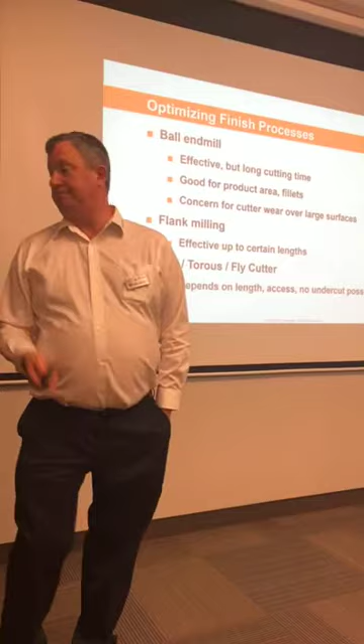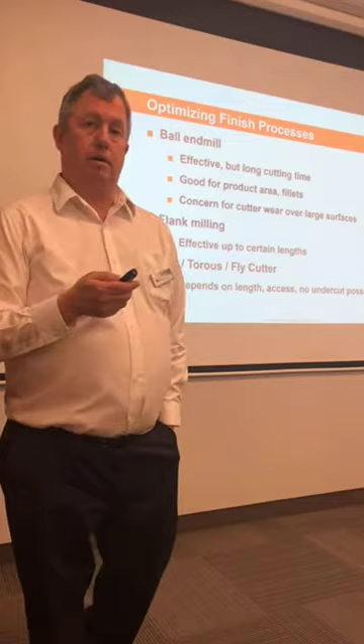Okay, so we're going to talk primarily in this hour about finishing surfaces. Everybody has to finish surfaces, really important because that's what people will see. The typical process on most parts is going to be ball end mills, and it's easy, it's well understood in 3-axis or 5-axis, but it takes a long time, a lot of passes, a lot of small steps.

In some cases, when you have simplified surfaces, you can use flank milling with the side of the cutter against the side of the part. In certain shapes, that's perfect. In other shapes, you get deflections, vibrations, and poor surfaces. For bottom type surfaces, you can use flat cutters or fly cutters. Again, there may be limitations with undercut or long lengths.

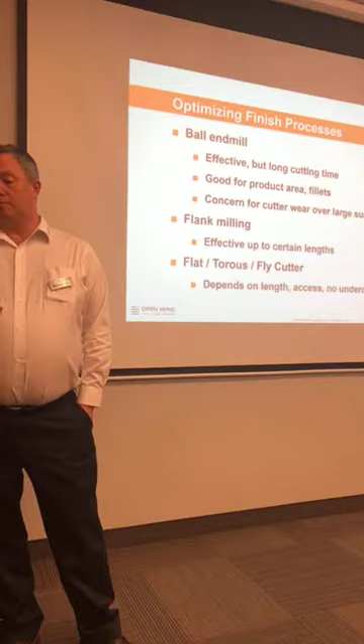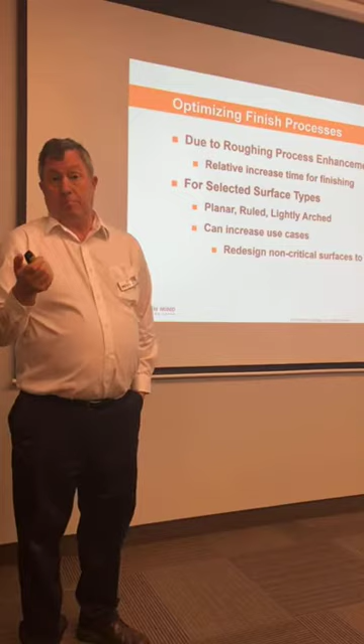So we looked at this, watched people cutting parts, and looked at the time of finishing and tried to come up with a process. We looked at planar surfaces first. Planes would seem simple, they're easy to work with, but there's a lot of planar surfaces in the world. Large automotive molds, aerospace, structural parts. We looked at ruled surfaces, similar but slightly more complex, and then just generally arch surfaces. And you can see that out in the shop on the 520 machine later on. We'll talk about that here.

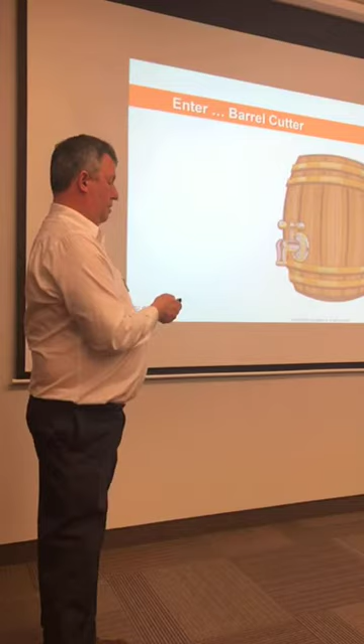So the concept we came up with, being a German-based company, was a barrel cutter. It's not a new type of cutter, but it's a new implementation for barrel cutters. And since we're machinists, small joke, we have cooling through on our barrel cutters.

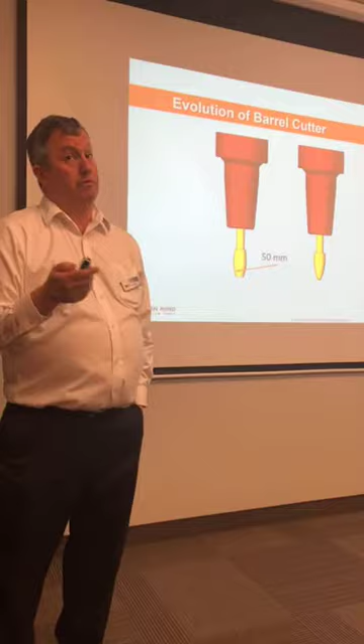So these are barrel cutter styles that I purchased when I was working in a shop in the late 80s. It would take 8 weeks to get a cutter. The project maybe was done in 4 or 5 weeks, so we didn't really use a lot of these. They were available, but they weren't very practical.

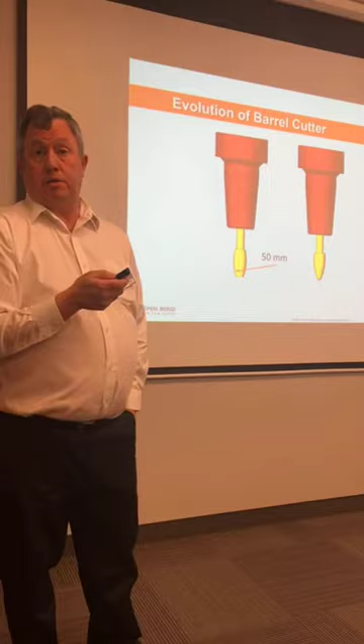Here we have, looking like our beer barrel, above and below the equator, but a fairly small radius was possible at that time. And then it was more advanced. They put a ball end mill on the bottom, and the last one, fairly common today as well, coming tangent to the shank of the cutter and using this barrel. And it's not a bad solution, but we're going to talk about and understand why we can do better.

So, let's see, get my buttons right.

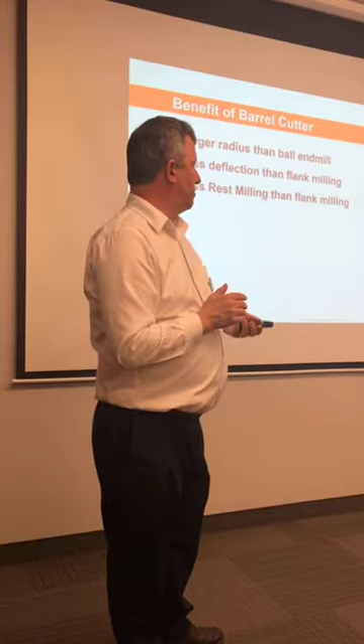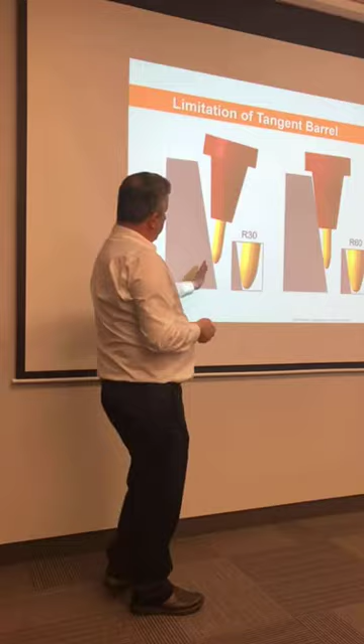As we do this, we get less deflection than that flank milling because we have a single point contact, so that's nice. And we started thinking how to apply this more and more. And we look here at the tangent barrel, and what happens when you increase the radius of the contact, the barrel. As you increase the radius, you can take a bigger step down. That seems like an improvement.

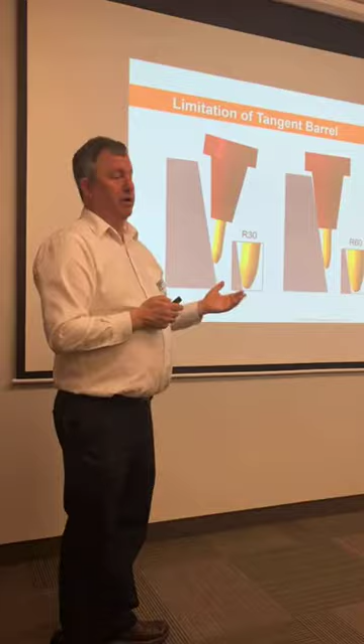But with this constraint to be tangent to the shank, as you increase the radius, you get a smaller arc. The cutter stands up, you get an interference, and the only way past this is to lengthen your cutter or reduce the radius. So you're not quite optimizing your situation. Still better than just using a ball end mill, but not the right solution.

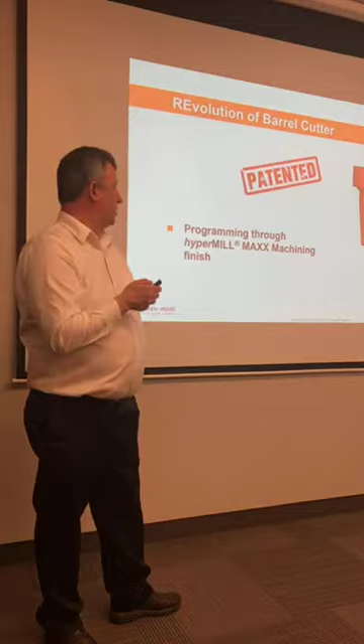So we went a little further, and some aspects of this are patented, which is nice, so we can talk about this pretty openly. We developed this in our high performance functions we call MAXX Machining. We have a cone angle here, in this case 17.5 degrees, and a large radius.

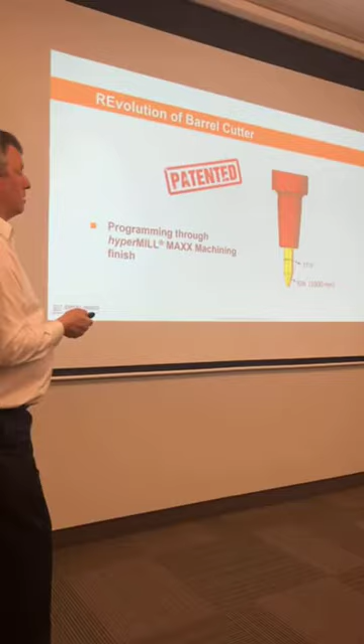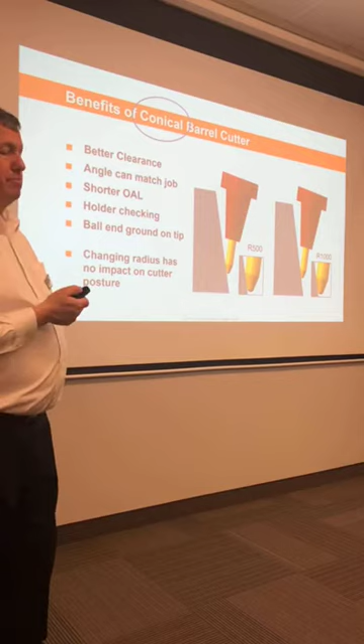And with that large radius, we had 30 and 60 on the previous slide. Now we're looking at 1,000 millimeter, in harder metals maybe a little bit smaller, just to improve the machinability. And here we look at the same kind of picture with a conical angle together with two different size radii. The posture of the cutter does not change. So the cone angle is what's controlling it.

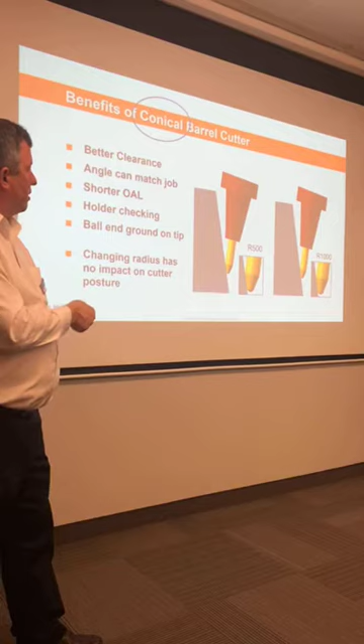We can design these cutters. Matthew has them cataloged. He can make specials. If you have a small drafted wall, you just need to tilt away from it. And as with all 5-axis machining, when you're tilted away, you get a short cutter. You can get your holder into the work channel, and you can save cutter costs, and you can increase your manufacturability with a short cutter.

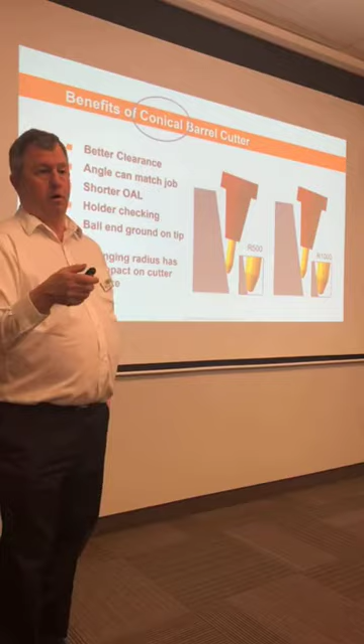So I think we hit most of the high points there. In this technique, in OPEN MIND's world, we call it conical barrel cutter. Matthew will describe it as their trademarked arc cut, a segment of an arc on the radius, so all the same. Here's a video. Did we do this right? Good. And it's what you expect.

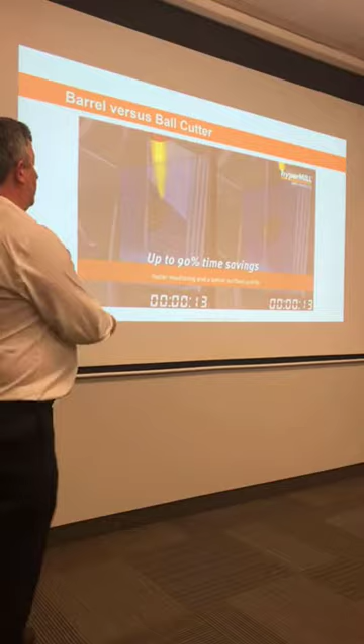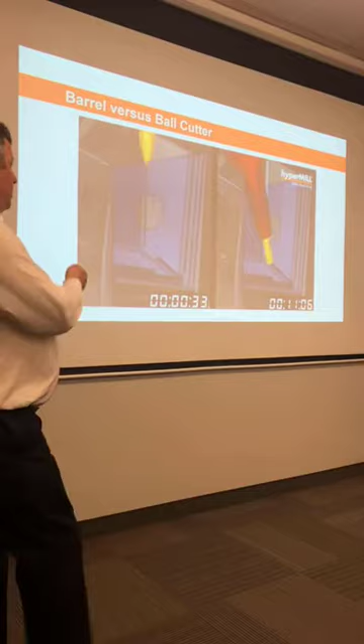But these aren't small changes, these are big changes. And we've had this 4 or 5 years. The message is getting out. It's getting easier to describe this. People have seen it on the web. And now we're in this position where people are interested and it's not novel anymore. You can try this. Easy to try.

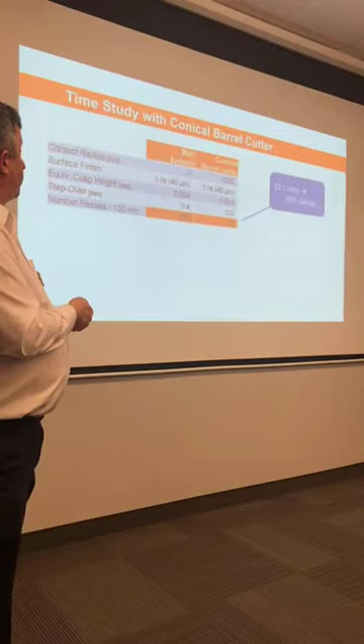A simple time study type of chart. Contact radius went up from 3 in this case to 1,000. Surface finish, we want the same. So here the number of passes, by the time you calculate it out, is more than 10 to 1. That's your 90% savings.

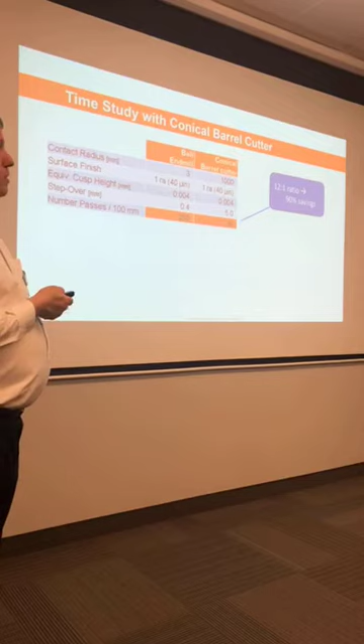People worry about the cost of the cutter. It doesn't cost so much. Maybe it costs more per unit, but if we're going to take 90% less passes, it's going to last maybe 10 times as many parts. So what's the cost per part? Very low. The cutter, if we recall from the other slide, had a ball end on the bottom. So you have a dual purpose, you have a second life.

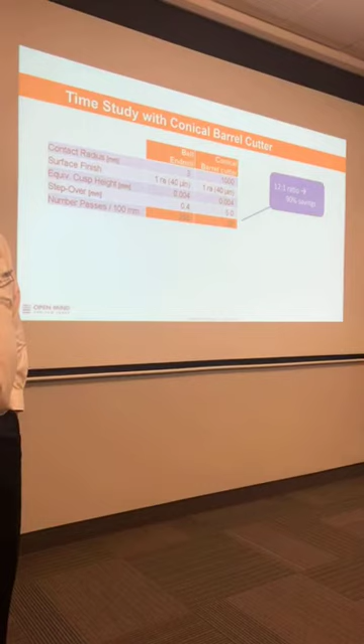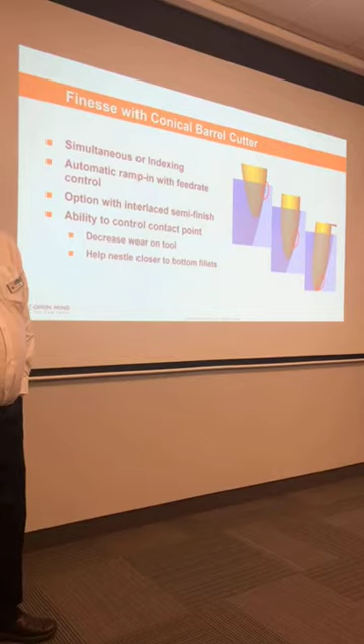Also, we can influence the contact point. So if you have a hard metal and you're going to wear out the cutter because you're cutting titanium, nickel alloy, if you have a different contact point, you can, in this case, increase the life another 3-fold or more. So the cost of the cutter is your first obstacle. It shouldn't really stop you in any way. This is, at this point, a 5-year proven process. It's smooth and it pays back.

The other benefit here, the last point, as we move the contacts down, we're also getting closer to leaving less material remaining behind, cleaning up into that fillet as best we can. So, nice operation. Here's some applications. Now we have a bottom surface. This is an airfoil structural part, 14 inches, 6 inches tall.

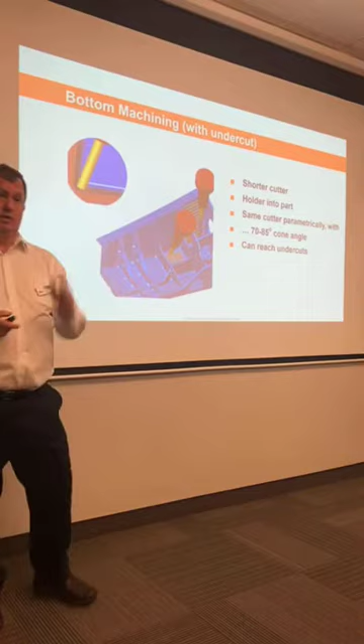If I came to do the bottom of those flat planes with a bullnose cutter and it's 6 inches long, and I need a 6-inch cutter because otherwise I'm going to rub this adjacent vertical wall, we have a problem, because a 6-inch long cutter is not going to cut really well. So now we have a 3-inch cutter. It's a plane. If it's a side plane or a bottom, it's the same. Here we're just going to tilt up a very large angle.

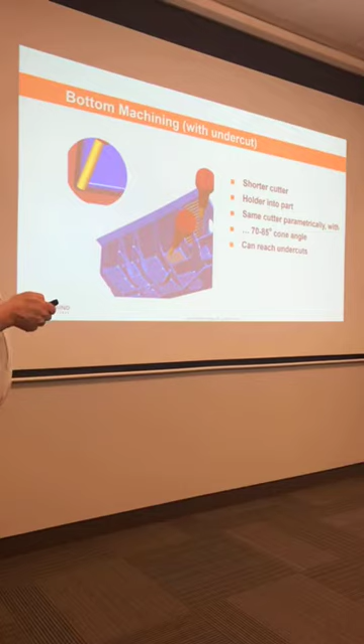We're cutting what looks like the bottom of the cutter, but it's that same conical cutter just flared out to a much bigger angle. So we can apply this to bottom machining, including here a slight undercut if your part has it. You can't do that with a flat bottom cutter unless it's some oversized one with a small shank. So some good things are possible.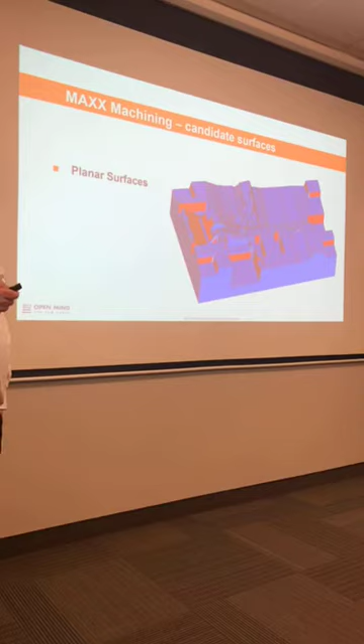Here's a typical automotive fascia mold. The red surfaces are initial candidates just by looking at planes. So this, I can cut that from the side, but it might be too large. I can cut this at an angle, but maybe the holder's going to hit here. So these red surfaces are our candidates for barrel cutting on this part.

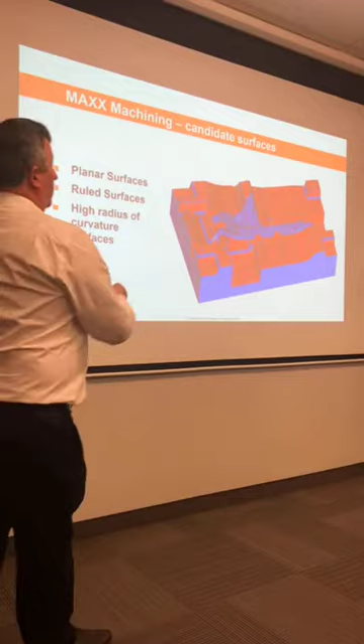If we look at the next slide, now I don't only do planes, but I can do any large radius surface. We can do almost the entire part except for the product features on the mold with barrel cutters. And we have customers redesigning their parts to enable more and more, because if it works, why not use it more often?

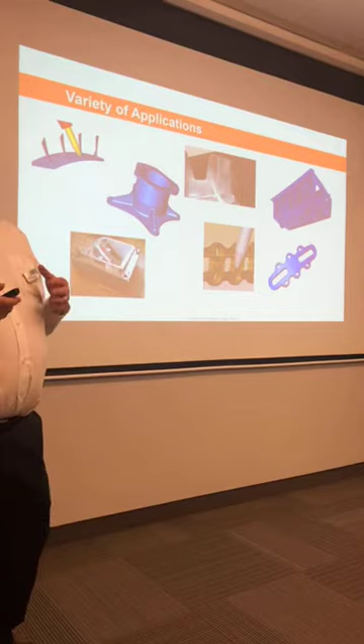So the applications could be in any industry. In our internal meetings, we don't want the Rocky Mountains up and down, but we're doing the medical spine plate on the machine out here, aerospace, molds, turbomachinery, anything with fairly large open surfaces.

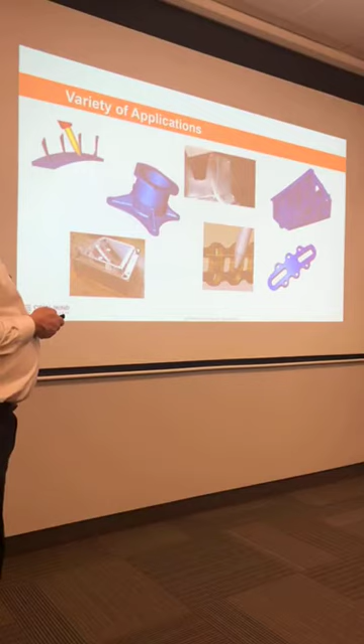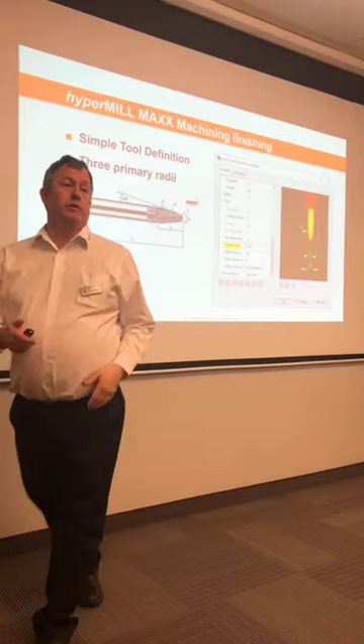But in our tool database, we have a barrel cutter style, and there's many geometry versions. This is from Fraisa's catalog. These 3 radii map out to 3 radii in our tool entry. It's very simple, so it's easy to apply this. You can build up a database. You can bring in tool parameters, and everything's easy to work with.

Unlike other new technologies, you're already cutting your materials. You use 5/8 shank cutters. There isn't too much that's different, but the amount that is different is powerful.

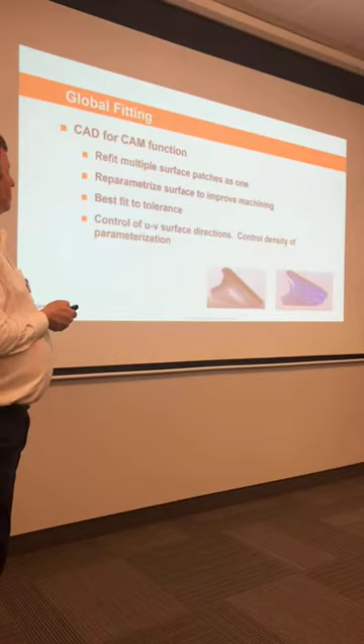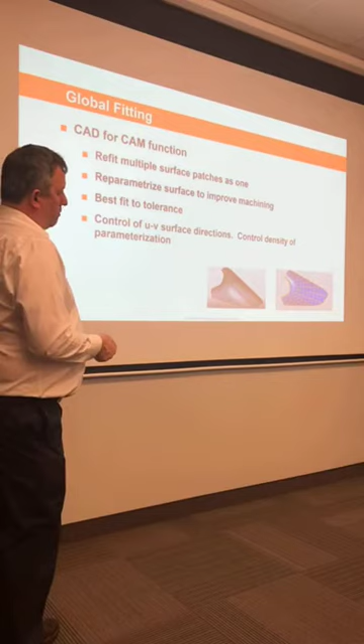We then learned, got some feedback from the first few early customers, and, I don't know if you can see it so clearly, this is some aerospace kind of part, but it's all patched up the way that sometimes CAD data comes in. We're running these tool paths over the surface, and we have to follow the surface parameters. So we came up with our own CAD function to refit a surface within a tolerance, and here to control and improve the parameters of the surface.

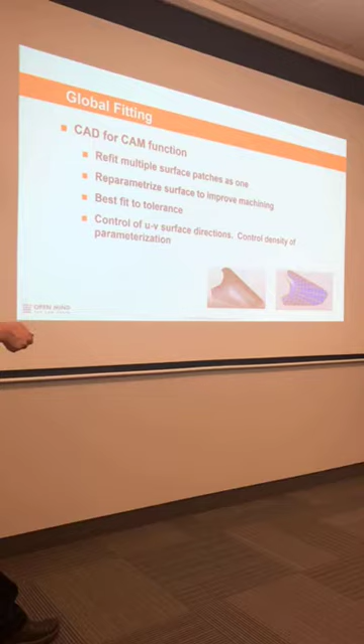Initially, we couldn't use the barrel cutter as effectively here. We'd have to do this surface and separately that surface. Now we can do it all as one. So we're increasing the application set for barrel cutters. And this spine bone plate was an example of this. We resurfaced it within tenths. So technically it's good, and it's smooth, and it works out well.

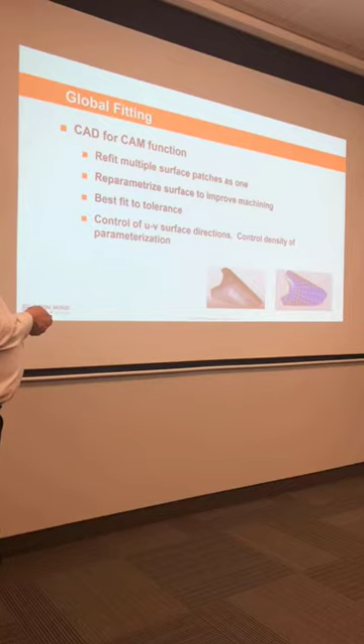So the standard barrel cutters are good. They're better than ball-end mills. The conical barrel cutters, better yet. Easy to program. Just click a surface. We'll check the boundaries, and we'll make the tool paths for you.

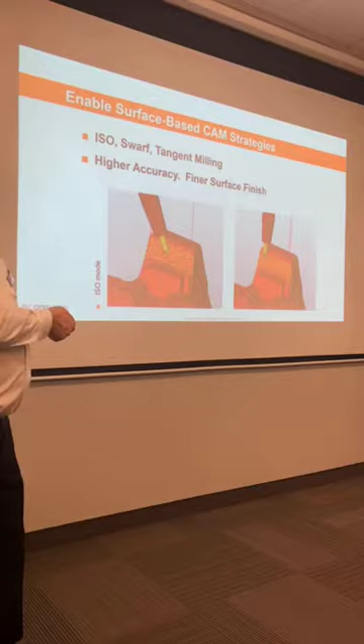Here's another case where we use the reparameterization just to improve the orientation of the cutter. So the UV is controlling where the cutter is going to be oriented. So that one worked out nice.

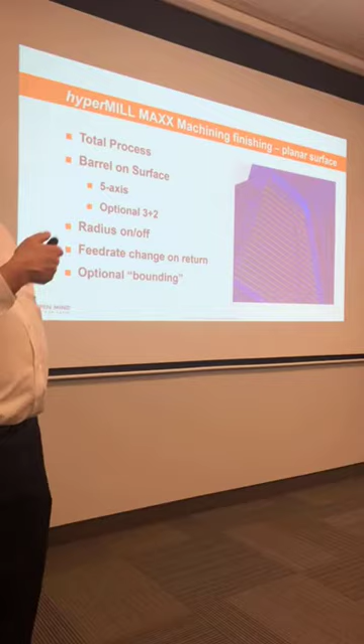Here on a planar surface, but in the middle of a complex mold, you can see a little bit some smooth rapid or smooth entry and retract. There's also a feedrate change, so when we move into rapid to reconnect, we're trying to be efficient. So we're not just focused on making a tool path go on the screen or on the part. We're making an entire overall process that's going to work out of the box onto your machines.

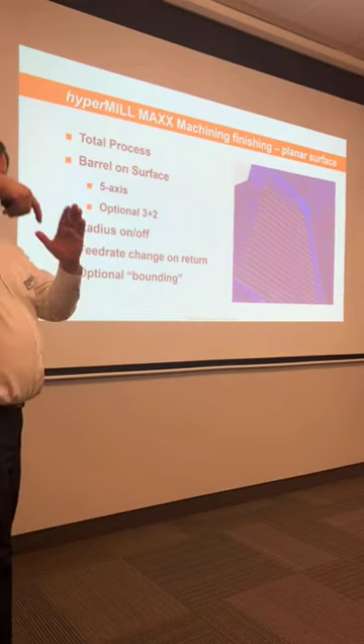The large cutters, when you have an internal corner, you may need to add some bounding passes, because the big barrel can't get all the way in, but we control it and you can use the ball end on the bottom, so everything's perfectly aligned. It's the same cutter, the same touch off on the machine, and you can get really nice blends with all this stuff.

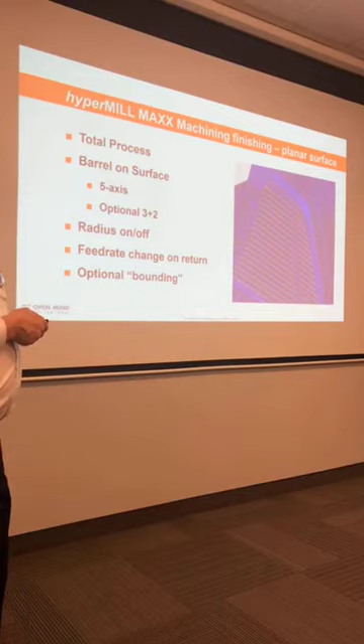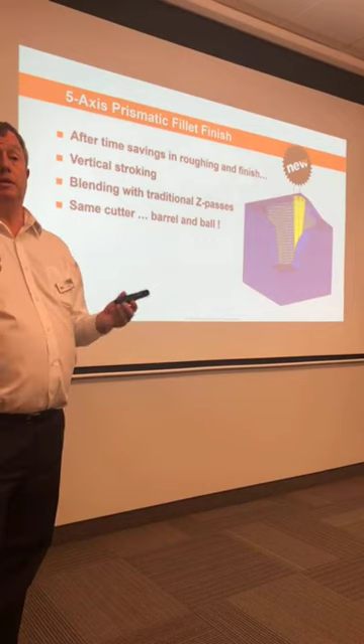So we started saying everybody has some high performance roughing. Very good. We added high performance finishing. What remains after, on many parts, is a fillet surface. And now on those fillets, you might still be doing some little Z-level step down with a ball end mill, and it takes a long time. So we've added and expanded again in our most recent release of the software, handling fillets either with a ball end on the bottom or, for larger fillets, the barrel. So we can do it in far fewer steps.

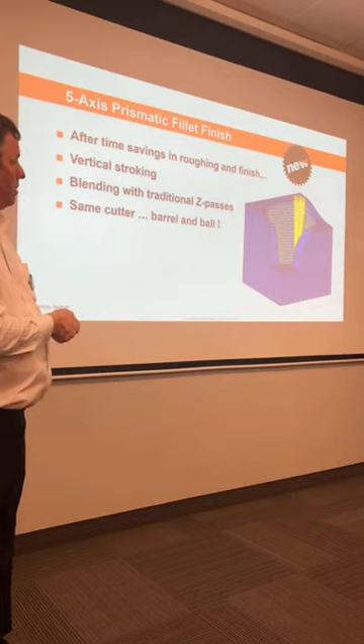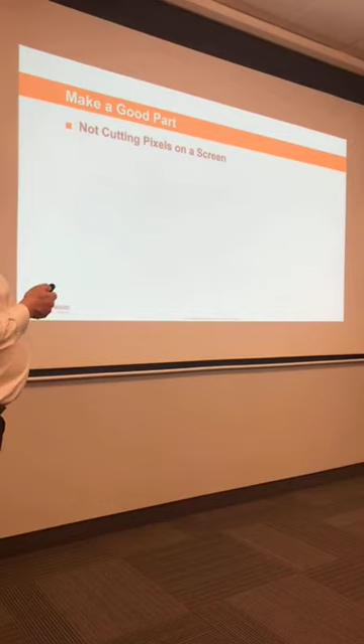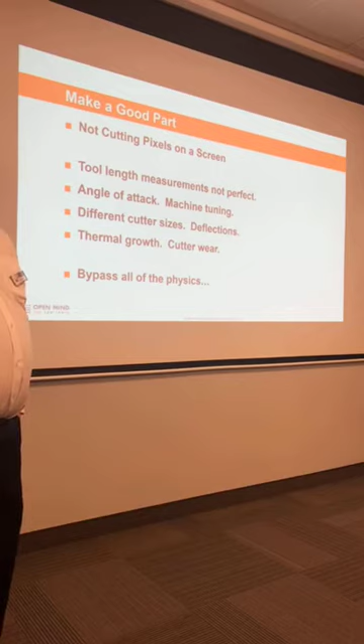So then a few little touch-up points to finish my portion here. We're trying to make a good part. Many years ago, our focus was to make a good tool path. If you had a good tool path, you would presume you get a good part, but there's some realities that happen in life. You know, the machines aren't perfect. The cutter lengths, the probe touch-offs, the machine heats up. There's all sorts of reasons going on. The cutter wears down, maybe the biggest one, and things don't blend well.

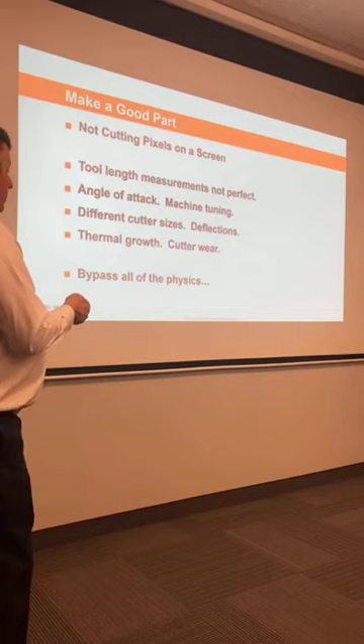So making the good tool path on the screen was great, but our goal in the end is to make a good part that, as was mentioned earlier today, you can sell. It's a part that doesn't need finish. So we could try to analyze all the physics that go on here, how to make a machine that holds tolerance in 85 degrees or 65 between morning and afternoon. So we said, let's bypass all the physics. It's not that hard. And we added some technology we call blending. And we've automated this blending, so you're not having to do a lot of CAD work to modify surfaces.

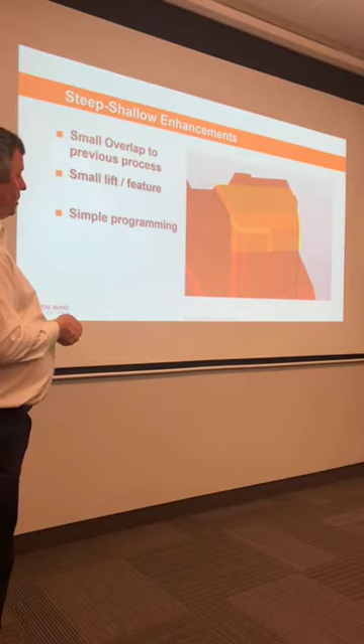First kind of blending we're doing is just the way we overlap. Typical process is steep and shallow sections programmed and cut differently. With this small overlap and then a small lift, so you don't come in together, just with a small lift, one button in the software, and you can't find where that crease is anymore.

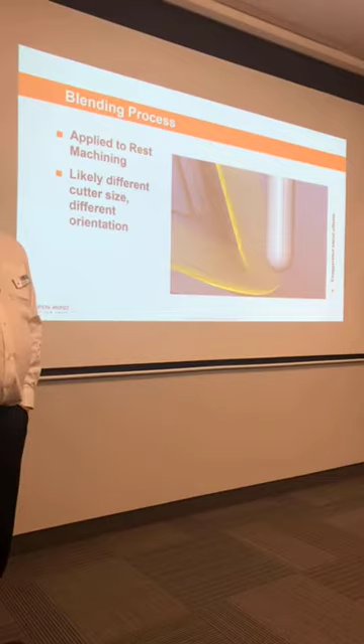Here, similar example, we're now in a fillet surface. So we cut this large wall, hopefully with barrel cutters. Then you come down to the fillet, and you have a small cutter. Maybe you've tilted it off to reach in there. And all of these issues about the physics on the machine come back into play. So I've exaggerated in this picture, but as we get to the top and the bottom of the fillet operation, we're going to blend out. A little bit of an overlap, and then a blend out, it's gone.

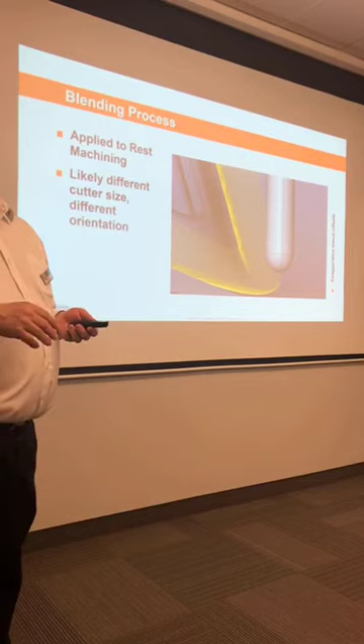So we initially released this to 2 alpha customers. One was making 6-foot steel blocks for these automotive fascias. First part off the machine, this is great. The inspector can come in from his automobile supplier. He's going to accept this. They would never accept the first one.

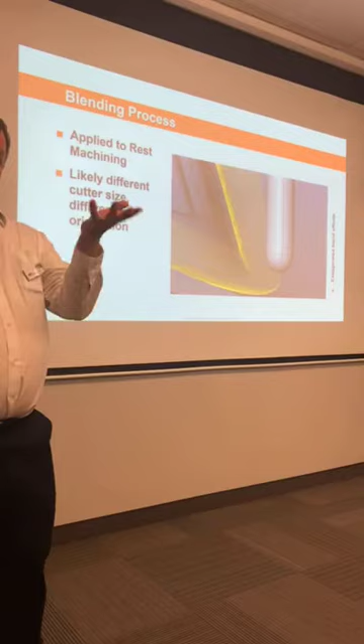The second customer was making small thermoform molds. You go to the supermarket and you buy blueberries and strawberries. Those baskets are made with HyperMILL. And he doesn't care about dimension, he just cares about the visual look, because in the end it's garbage. You eat the berries, you throw out the plastic. But he needed this blending.

He had a 10-year-old machine, and he says, I know HyperMILL's not the problem. My machine isn't keeping up. Please help me. We offered him the solution. He's still running the same machine 2 years later. So again, we apologize for not helping the sales of new machines, but customers are looking for solutions that make sense in their daily business.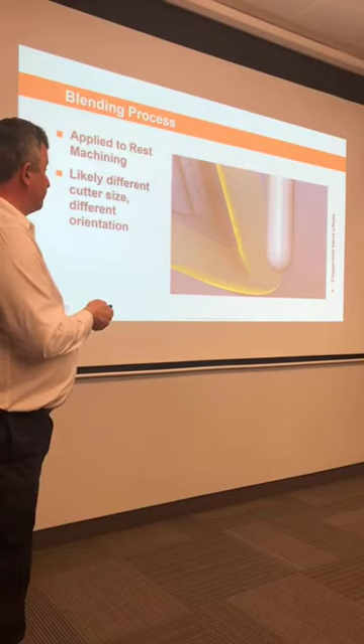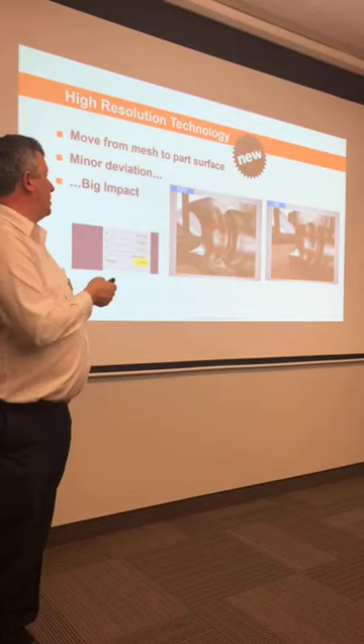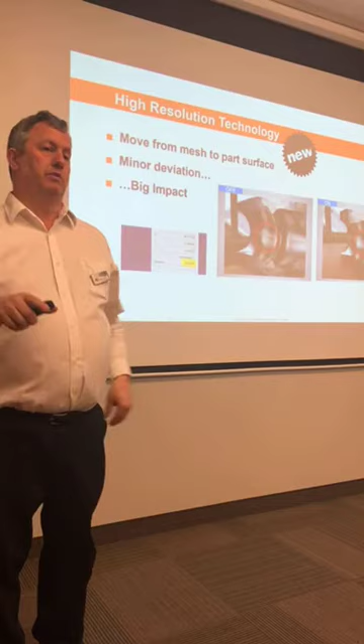Also in the latest version, and we're still collecting data, a new fantastic operation. Almost every CAM software is running surfaces to a mesh that sits on top of a surface. And this is a standard operation used in most CAM software. If you have multiple surfaces and blendings, it's hard to manage it in the CAM by putting one consistent mesh over the surface. We can treat all surfaces the same.

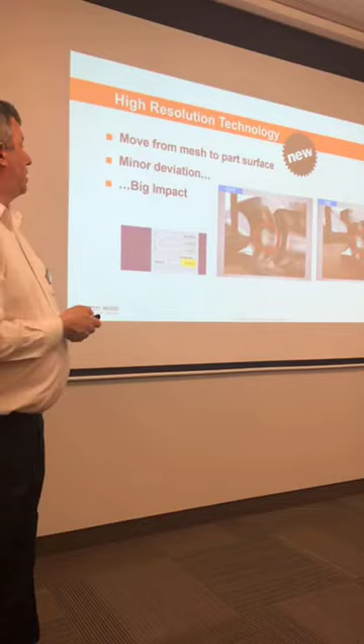We cut the mesh. So now it's a little hard to see as always because we're talking about microns, but we cut to the mesh and then we push it down to the surface. So we're actually cutting to the actual surface. We've had comparisons done against 3 or 4 other software. This result is making the difference. In one of these examples, in metric, we moved 0.002 millimeters, 2 microns, and that was enough to make the difference of a faceted look on a surface to a perfect look.

So again, focusing on finishing with the barrel cutters, here just on surface finish quality itself. And I think that's it. Matthew's going to continue and talk about the combination, software and cutters, and if you have questions, let us know or find us here.

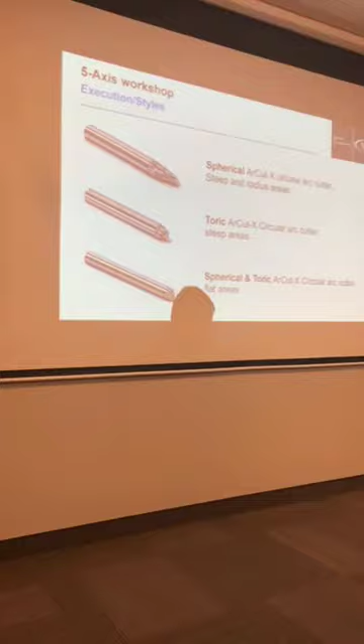So what I'm going to talk about is the ArCut-X, what we call our barrel cutters, and the different styles of barrel cutters we've produced. I'll talk about the geometry behind them, because it makes a big difference how you grind these tools, whether they're going to work with this software and in these applications. Then we'll talk about where to use them, expanding on a couple spots Alan already covered, with one use case. We'll also talk about our tool expert—when programming with this software, how do we get the right speeds and feeds to use these barrel cutters? That's not just a given; we have to figure that out.

We produce spherical versions of our barrel cutters—that's barrel to ball. We also produce a toric version. If you don't need the ball nose at the tip, we have just a third corner radius, kind of a bull nose to barrel. And we also produce what we call a floor finisher, or lens finisher—the steep angle version that lets us finish any flat horizontal surfaces.

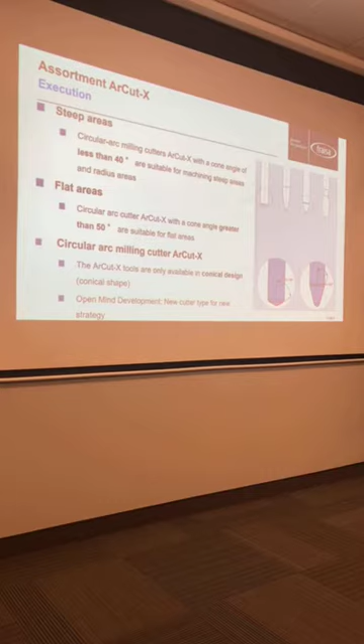The cone shape on our floor finisher is above a 50-degree angle. As Fraisa, we got lucky because we came into this a little late, so we didn't have to go through the evolution—we have the conical, made to HyperMILL's specifications, and then the floor finisher. So we're hitting the steep areas with the conical barrel, and the flat areas with the same conical barrel, but at more than a 50-degree angle, making it more of a floor finisher.

And like I said, these tools were specifically designed with HyperMILL in mind.

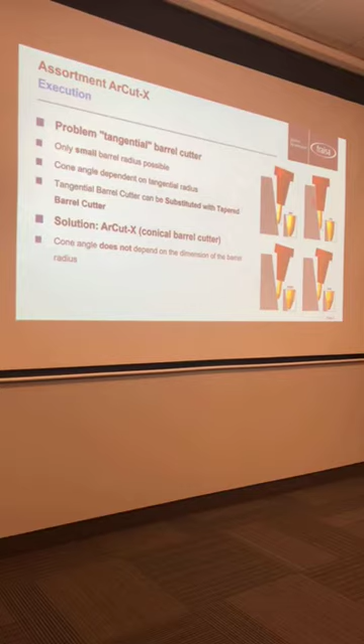The problem, as Alan showed with the tangential barrel, is that we absolutely have to stick to a small radius. Our solution with the ArCut-X gives variations of this up to a 1000 millimeter radius—roughly a 15 degree, 20 degree, and 30 degree version. Depending on your working angle, you can choose the right tool to maintain that angle. With the range we've created, covering 250, 500, and 1000 millimeter radius options, you should be able to hit the majority of the work you want to do.

But again, just like we did for this bone plate, if you have a radius that's smaller, we can produce the right size radius, like Peter mentioned. Take a look at that concave feature, and we can produce the right size barrel—it still makes a world of difference in time versus a ball nose cutter.

Whenever Fraisa produces tools for specific applications, we look at a variety of things. We're not the only players here—there are other high performance cutter manufacturers producing barrel cutters, but I'd like to highlight some of what Fraisa does. We look at raw material, what we're producing the tool out of, the carbide itself, and depending on the application we choose different carbides for different types of features.

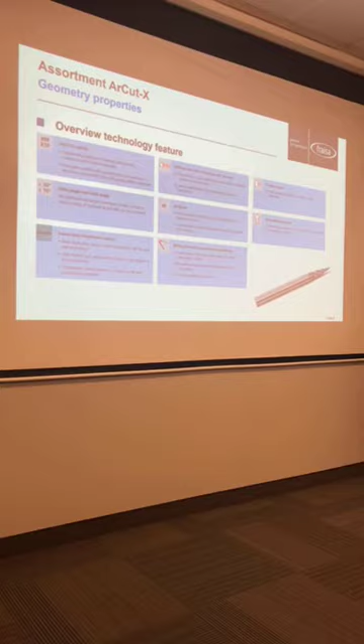We use what we call our X10 carbide. It doesn't really matter—I could tell you I got it from the moon, it doesn't make a difference. What does make a difference is that we tried different carbides in these applications, tested the tools, and came up with what we thought was the best result. When you're talking about a barrel cutter, it's just a giant ball nose tool, so we wanted a very hard carbide that can withstand a range of materials, plus these light cuts and more heat than what we're used to in a roughing carbide.

Roughing carbide that we use for roughing tools is more flexible; this is going to be a little more rigid. We've increased the core diameter. It sounds like, why wouldn't you be able to do that in any case? There's a lot more behind that—this increased core diameter is a difficult thing to accomplish when grinding these tools, to keep it consistent.

I know Alan said that once you've used our tools in a 5-axis scenario, it's probably not very expensive, but as Fraisa we also always like to resharpen these tools. So you have to be able to make the tool so that it can be resharpened. One of the key factors as well is H6, the heat shrink tolerance.

We grind ours to H5, so the shank tolerance is H5. That's going to mean better precision, better concentricity, more accuracy, less chance of slippage or pullout, which you probably wouldn't see in a tool like this. Dimensional accuracy is also something that is very critical.

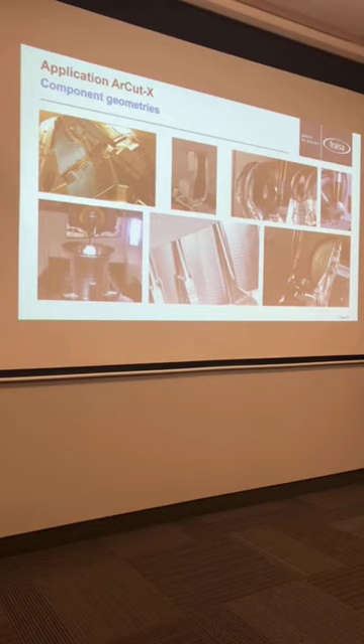So I think between Fraisa and HyperMILL, we have a lot of customers that are either sending us prints or models and saying, what would you do? So that's, I think, a good solution. Send it our way, we'll take a look at it and say whether or not we think there's an advantage to it. If there's no advantage to using a barrel cutter, then certainly we're not going to tell you there is.

So getting to the application part, we've created a software called Tool Expert for ArCut-X. What this Tool Expert does is basically look at what you want to do for your application. So you can go step by step.

That's where we're producing. This is actually either a bovine or an equine bone plate. So if your cow breaks a leg, then you might have to buy one of these things and put it in. But essentially what it's showing us is the possibility of processing on a smaller part as well. We didn't get very, very small, but we have done smaller bone plates than this with an extremely good result. And you'll see that it's a very high quality surface. You have to actually touch it.

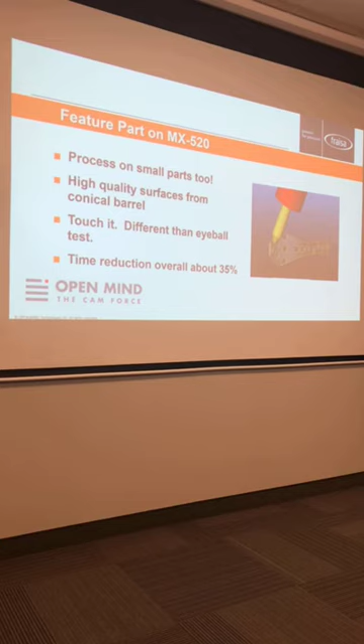Are we just going to finishing out there? The form tool, we went to finish. The general shape from the catalog, what you're seeing on the screen here, was the super finish. Okay. Because of the form tool having such a smaller radius, which was 20 millimeters as opposed to what you're looking at here, 1,000, the step over gets of course much smaller, so it takes more time. Sure. But if you take a look at it, you're going to see the step downs. You're going to see the tool path.

You'll see that in every part that we've shown, but feel it. You really have to feel it. That makes a big difference. If you go out there and you actually feel the part, you'll notice that you might see the step down, but you can't feel the scallop. And like I said, in aerospace parts, the pre-finishing, these bigger scallop heights are probably good enough for what you're coming up with.

And again, this one, we didn't have quite as much time savings because we had the smaller, tighter radius and the curvature of the back side, but still 35% over ball milling. So that's pretty good. Does anybody have any questions for Alan or I? We're gonna be out there as well, so we have plenty of time to talk to you.

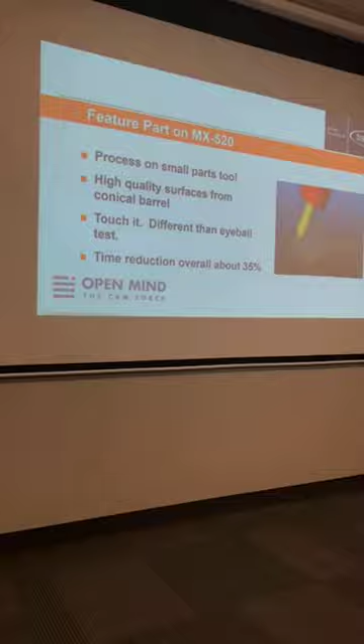Is anybody currently using barrel cutters or have tried? Yeah. And so far, good experience, bad experience? 90% savings. Yeah. On all sorts of surfaces, or just straight walls? Well, I had questions for you on the mesh thing, because that was one of the complaints my programmers had, was it doesn't do well with the surfaces if there's multiple surfaces intersecting, and I didn't know that was a possibility.